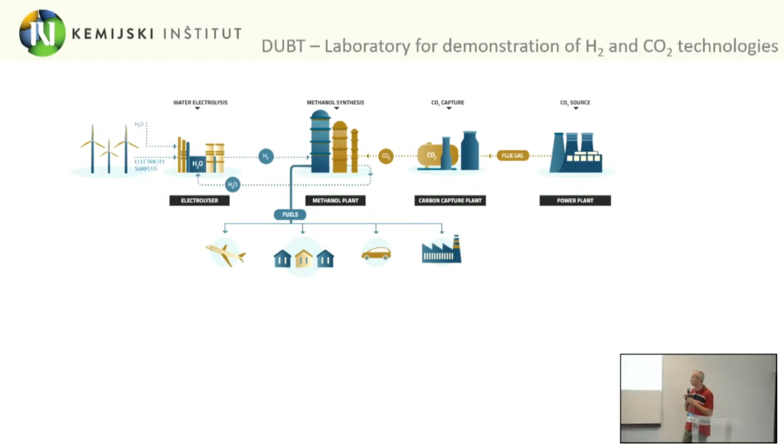So when you look at the dynamics, you have the oscillations of the grid, then you have the oscillations of an electrolyzer. You typically have a kind of hydrogen buffer tank in between. It's not shown here, but the bigger the buffer, the bigger the capex, but on the other hand, the bigger the buffer, the more storage you have, and the more you can dampen the oscillations of the electrolyzer. So this was the MEF CO2 story.

And nowadays, we're still heavily invested in e-fuels, but we've ventured much more boldly into ammonia. So Oracle is the first such project, where the idea of electrifying ammonia synthesis is by plasma, by induction, and having direct electrochemical synthesis.

Hydrogen Valleys is a concept I was just discussing yesterday about the Spanish case, where they have about 8. In Slovenia, we, for the time being, have 1. Its peculiarity is that it's transnational, in between the north of Italy, Croatia, and Slovenia.

Basically what Hydrogen Valley represents is a kind of new paradigm where you are also, in most cases, coupling together actors which previously would not be so intensively coupled—especially energy industry with other energy intensive industries like steel, cement, or in our case, particularly of interest, chemical.

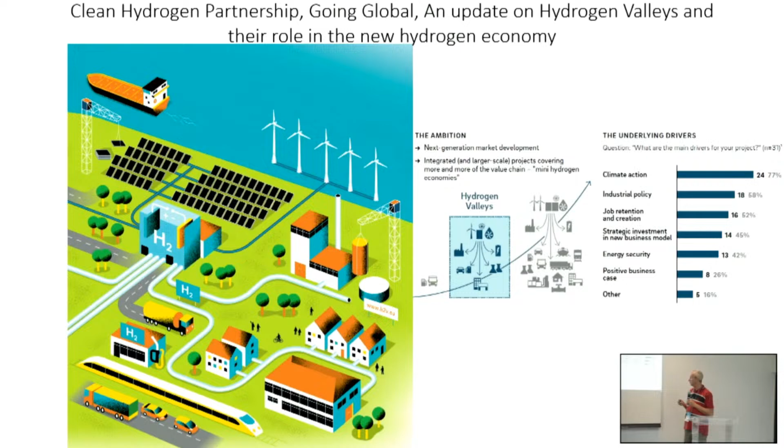Now, going more towards the use cases of hydrogen, where hydrogen makes sense at scale: the energy sector alone typically struggles quite substantially with hydrogen because of its offtake prices. Of course this will improve when the scale-up or ramp-up of production comes, and when the infrastructure is there. But before that, there are already island-type operations where there is a solid business case.

And I'm very happy that one of those, this interim project, is H2 Glass.

We have a container glass manufacturer in Slovenia that we started working with on hydrogen back when it wasn't trendy at all, maybe 2012, with electrolysis. They use the hydrogen and oxygen for oxy-fuel combustion, providing system services and creating about a 20% margin on the hydrogen, which they can't directly cover but offset through the premium on their products. They have high quality glass that sells for much more when it's decarbonized, defossilized, or even carbon negative. The beauty is the company is starting to use electrolysis and hydrogen commercially this year, as a continuous commercial process.

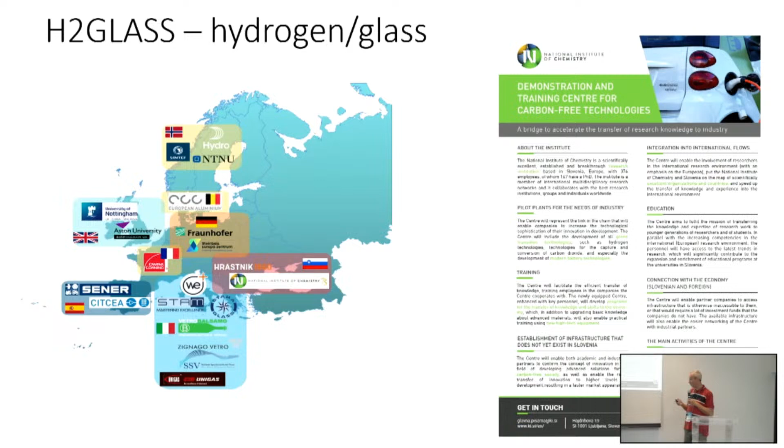Now going to sectors with less premium. I mentioned ammonia before as another opportunity that poses itself directly. Glass production, or any oxy-fuel furnace process, is a natural candidate because it also uses oxygen, as does gasification, which Paolo mentioned yesterday.

Hydrogen peroxide is also a prime example, because the two reactants you need are basically hydrogen and oxygen. Currently this is done by reforming natural gas to get hydrogen, and getting oxygen from somewhere else. With electrolysis, you produce both stoichiometrically, and can go toward the traditional anthraquinone process quite straightforwardly. Less mature approaches include electrochemical oxygen reduction to produce hydrogen peroxide.

This is one of the projects where we're actually moving toward the demo case, like H2 Glass, which is why I'm particularly happy to say so. The demonstration will be in Slovenia, and we are putting it together.

Ecoduct is also one such case where the premium is somewhere hidden in the production of chemicals. I think this was also briefly mentioned by Paolo yesterday, maybe not for the refinery case but for others. Within Ecoduct, the idea is to electrify the process and take care of the sulfur-containing compounds coming from a typical refining process, producing hydrogen and sulfur in between, and then going also toward e-fuels.

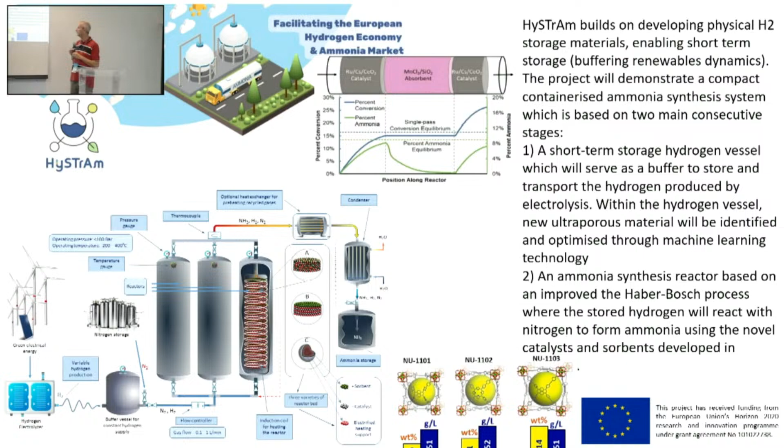I don't think I need to go again into the details of why ammonia is very interesting. It's carbon-free, at least directly carbon-free. It directly couples sectors of energy for hydrogen storage and fertilizer production. There's plenty of research to be done at higher TRLs, 5 to 8, but also at lower TRLs for plasma ammonia synthesis and electrochemical ammonia synthesis.

Dare2X is another example where the electrification is by means of plasma. The idea here is to have an electrified process to couple nitrogen and hydrogen to produce ammonia.

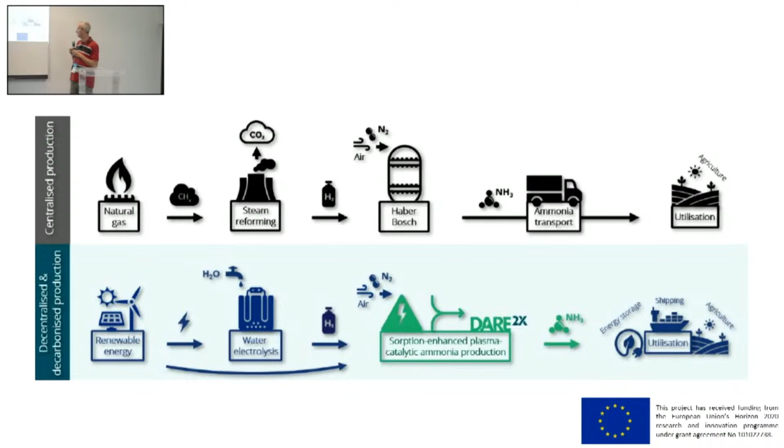This is how we are doing things ourselves, mostly investing in induction-based electrification of processes. Why? Because it's very fast responsive. It can deliver heat to the exact location, as opposed to joule heating or plasma, which is difficult to manage. With induction, if you have a structured material, you can heat up very selectively. And with the advent of renewables, you can do this in times of basically 10 seconds or so.

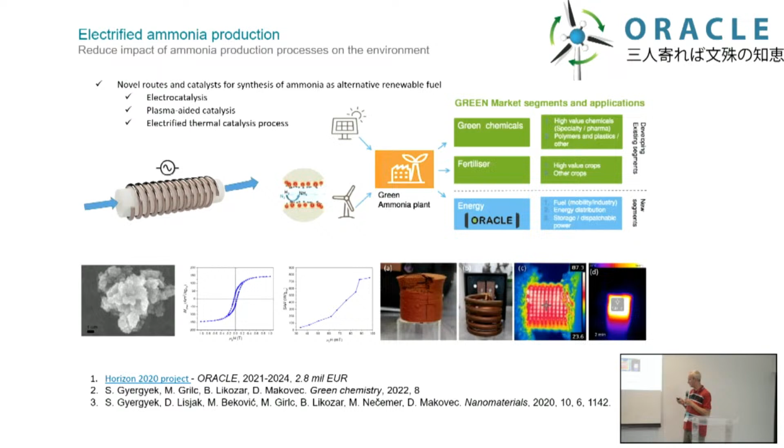There are also projects where hydrogen is going to very diverse sectors. Reveal is basically aluminum and aluminum oxide leveraging, a kind of aluminum cycle we're using for long-term seasonal energy storage, partially with and partially without hydrogen.

And as I've mentioned, various sectors — DINAMINE is a project looking at the use of hydrogen for defossilization of mining operations. There are a few pilot or demo mines all over Europe, graphite included, one even in Portugal, Felmica. The idea is to have defossilization of everything from mining equipment to mining transport.

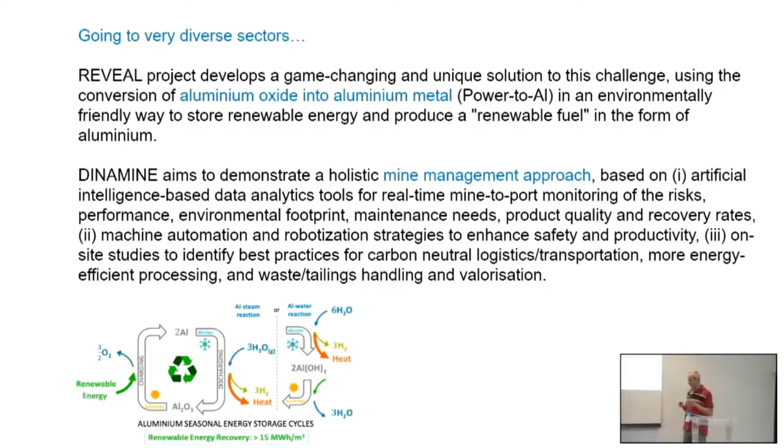We are also one of the coordinating regions in the Vanguard Initiative pilot, together with Malopolska and Lombardia. It's not a big financial thing, but it's a kind of liaising with other hydrogen initiatives like Hydrogen Europe and Clean Hydrogen Partnership that fits nicely with Vanguard.

The typical question of many people is always, do we always need hydrogen? Of course not. Hydrogen is typically the last one in line where we don't have any other options. Direct electrification is always the right way to go, and it's typically much more efficient.

I'm mentioning this because Slovenia is very small, so we don't have many Innovation Fund type of projects. We were very happy to find out that ours with the glass company was actually the first one, and it dwells on hybrid furnaces where you do as much electrification as possible with direct electricity instead of hydrogen, but of course you also have on-demand hydrogen.

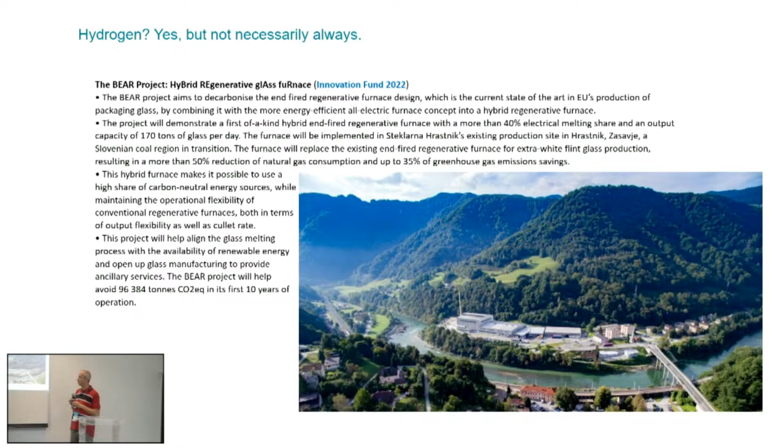So you can play around with various blocks and put together a business case depending on the availability of electricity, and this can also provide the buffer for your hydrogen. Solid or liquid hydrogen storage is always the best, especially if it's a nexus to some kind of production, in this case glass or iron manufacturing. You could just have a few silos and that's basically your energy storage.

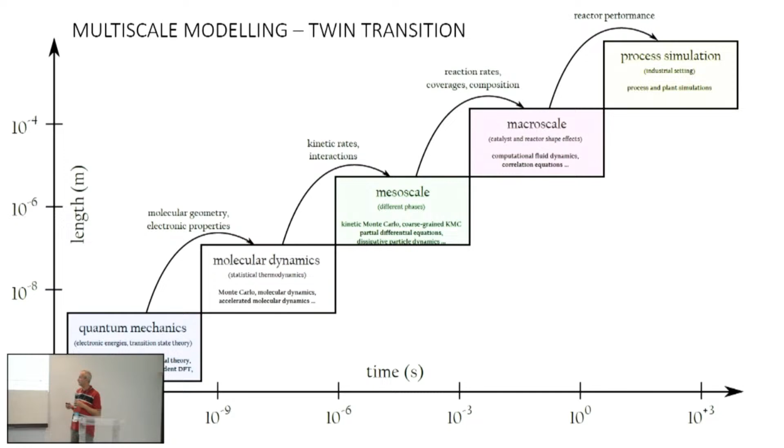Multi-scale modeling I've mentioned yesterday already, so I won't go too much into the details. It's inherently related to all of these processes if you want to know the dynamics at various scales. For this you need computational equipment, and one of the HPCs that was set up in Slovenia was, at the time of its build, basically 19th on the top 500 list. So this is something we definitely extensively leverage in our computations.

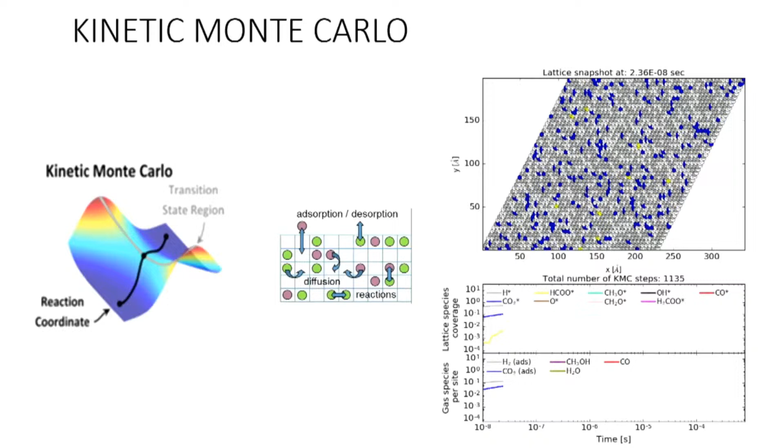Since I've talked about various scales of modeling yesterday, and there's just 2 minutes left, I will stop with this. We started off with, let's say, national TRL 3 to 6 projects, and it's very nice that we got our first broader hydrogen program that also invests heavily into research, which we are leading at the Institute. This will boost up the activities of the aforementioned center that is rising up and has so far gathered about 30 million euros in capital.

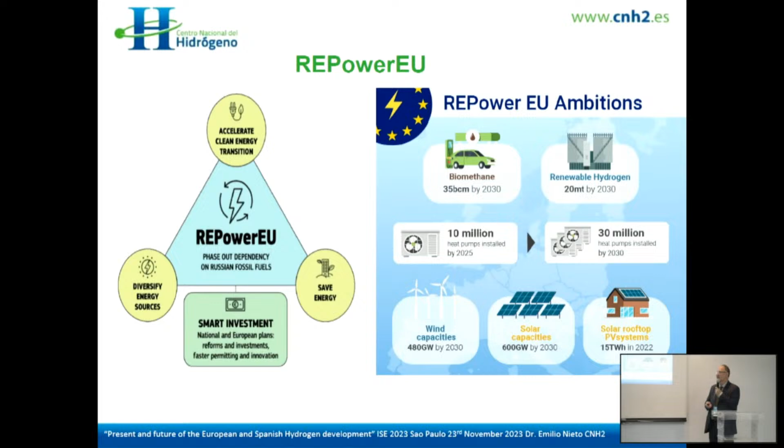So it's quite an important point, because now all of the countries need to rethink again and try to reinforce the messages and increase the main goals they have already set.

In the meantime, all the people are worried about the definition of renewable hydrogen and which are the clear rules for everyone to work together under the same conditions. It's not a finalized document, but what is clear is that there is a rule, a definition of how renewable hydrogen will be considered. Whatever you like it or not, what is clear is that there is a definition, and when you say you're using renewable hydrogen, you know which things you need to comply with to have that definition.

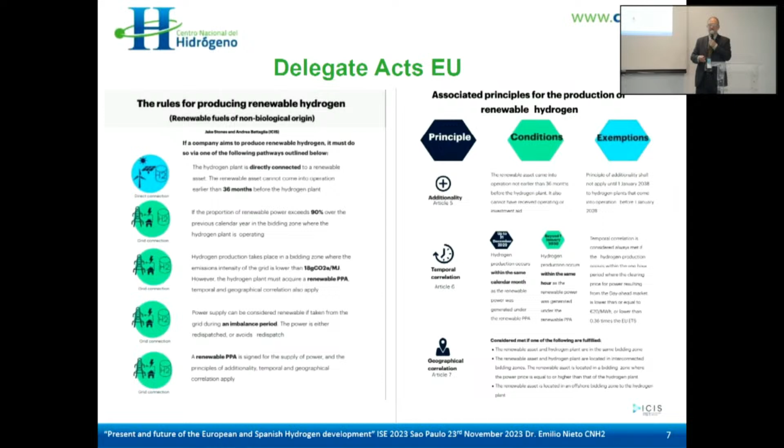There are some different principles and documents about the temporal rules, about new installations from renewables, in order to be able to continue working on that. So at least there is a common condition, a common ground for all the different countries in Europe, to work together and comply with these kinds of rules at the beginning.

As most of you know, on the 8th of November the Commission launched the first auction, 800 million euros, in order to continue pushing the movement of these projects put in place in the different member states. It has been announced that in spring of next year there should again be between 2 and 3,000 million euros in the second auction, to give the possibility for different projects that are on the borderline between green or red in the business model to go ahead or not. So it's important, it has been a success.

We don't have information yet about how many companies have applied, but what is clear is that among all the projects presented yesterday, and also presented by my two colleagues, some of them are costly projects, some don't have good advantages from the economical point of view. This is why these kinds of borderline projects can use this kind of money to be on the safe side from the investment. It's another kind of help to allow the different companies with different propositions to go ahead.

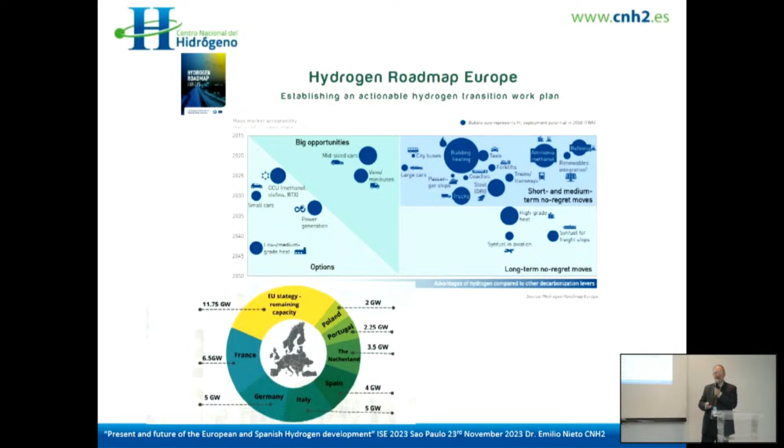If we want to talk about how Spain considers all this documentation, you know that the Spanish love to write papers. The problem is complying with the goals defined on the papers. But what is clear is that we have a lot of different documents, a lot of different roadmaps - not only for hydrogen, but also for renewables, for maritime applications, for wind, for auto consumption, and the last one is the guarantee of origin of the hydrogen. This is quite good in order to have the certainty that you are consuming renewable hydrogen, as all of us want, in order to move toward sustainability.

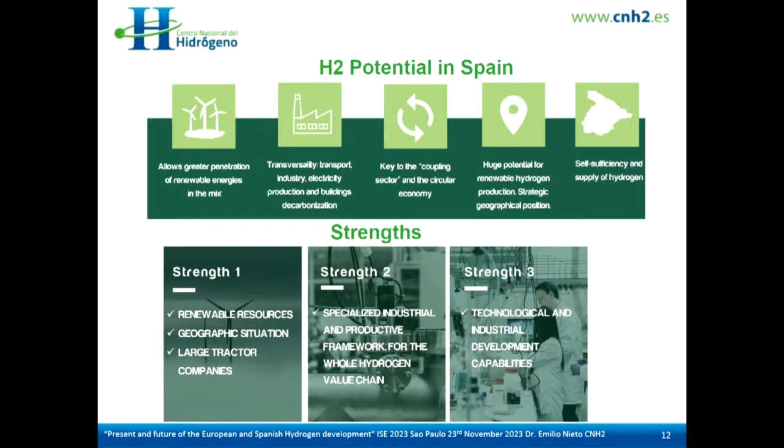Of course, you can imagine like Brazil - we have a lot of sun, we have a lot of wind, so we are in a privileged area from the geographical point of view. Spain is a country that can be seen as having high renewable potential and capability, also high capability from the different actors, the stakeholders along the value chain, in order to continue working together to be one of the top level countries producing renewable hydrogen.

We have reviewed our main goal, and you can see all of them are aligned with this REPowerEU. So we have to increase and rethink again, because the previous objectives that had been defined will not allow us to be in line with the different objectives that have been set. So you can see here we can multiply by 2 or 3 in some cases the amount of renewables, the amount of integration of renewables into the matrix, and the amount of gigawatts to be installed in 2030.

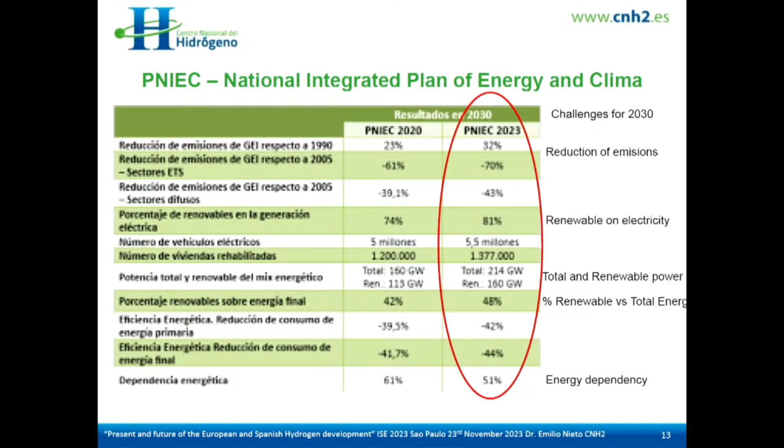As I told you before, from 4 to 11 gigawatts. And you can see here we have a commitment about the number of hydrogen refueling stations we need to have in 2030, the amount of the different lines of buses and trains, and the amount of vehicles, not only light but also heavy-duty vehicles in Spain.

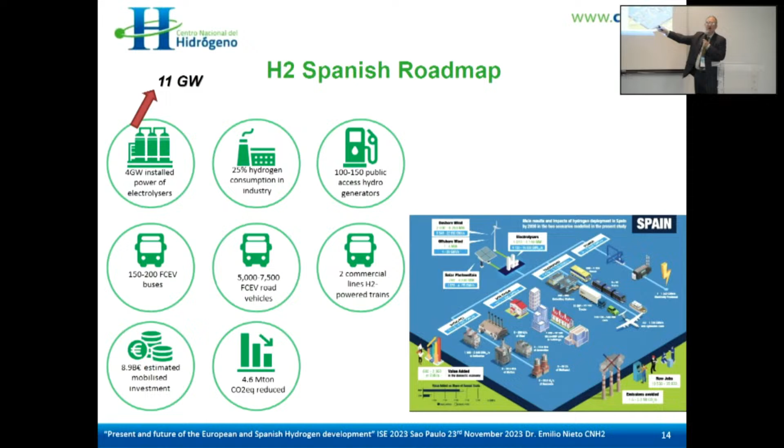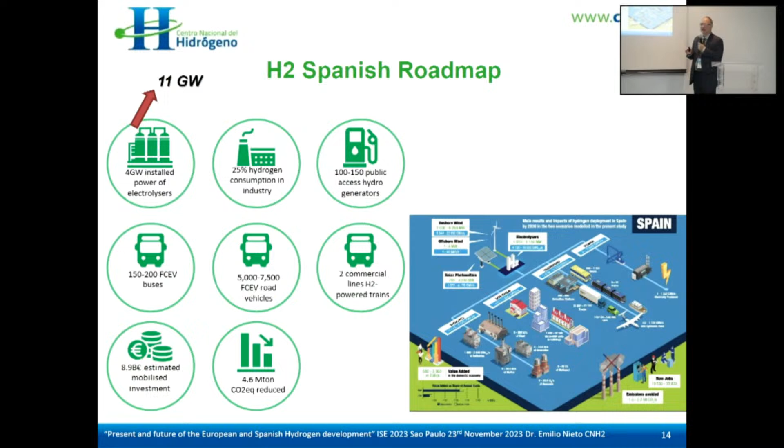So we have a lot of things to do, because - since I'm the only Spanish person here, no other Spanish hearing me - it's absolutely impossible to comply, at least with the number of hydrogen refueling stations. We have now, I think, 12 or 13, and we have to be at around 100 by 2030, so it's impossible. There are not enough equipment manufacturers to allow us to think again about having this equipment. You have to integrate it, install it, and pay for it. So it's very complicated. I would say that if we achieve 50 or 60, it would be a very high success.

This is the moment of the hydrogen, not only in Spain, but in all the countries. And we are receiving a lot of money from the Commission, around 70,000 million euros in order to make this transition feasible and possible.

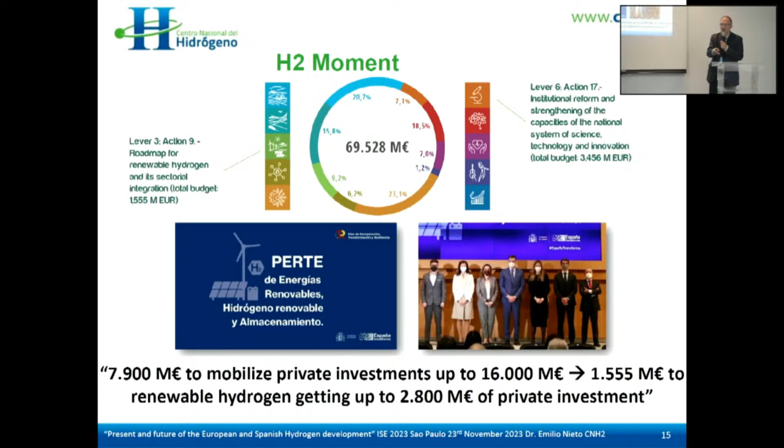This is not only for the administration, this is a public and private partnership. There isn't enough money for doing everything only from the administration, so we need to convince companies to invest, and the rule is more or less 2/3 from companies, 1/3 from administration. I'm giving you the warranty for this investment and how to work with safety and standards so your investment will be in a good position, and you as a company comply with this 2/3 in order to continue working and try to decarbonize the different industries.

If we look at the projects, yesterday I saw this picture, so I'll be quite fast. In Spain we have 123 projects running now, and most importantly they should be finished around 2026, so at the end of 2025 or beginning of 2026. We can say 1 year of delay, so 2027. In 2027 we will have 11 gigawatts and this amount of hydrogen to be produced in Spain.

What we have to work on is how the end use of this hydrogen will be. So the main goal is to convince companies to use this terrible amount of million tons instead of sending it to Central Europe, to be used first in Spain and later, with the excess of this hydrogen, to be transferred to the European Commission.

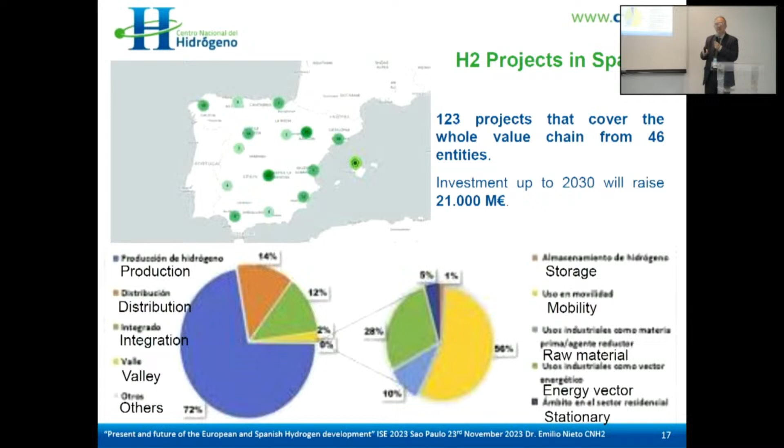But what's important for me, as I told you yesterday, is that we are covering the whole value chain. It's good news that we are focusing on production, but not only production. We are also taking into account the logistics and transport of this hydrogen, and we are working on the valley concept in order to continue working on a wide scope of different possibilities.

This is the map I showed you yesterday, so you can see some of these 123 projects, and later on I'll explain how different funds and proposals should be used to continue working with us. You also have innovation funds, large and small scale. These are some of the projects integrated in this 123. We need to use all the different tools you have in the Commission in order to save money and try to integrate all the different funds to be as effective as possible.

Also IPCEI - there are two, one for development of the technology and the other for developing the use. There are 4 projects and 7 projects coming from Spain in order to continue pushing forward, increasing the capabilities and trying to increase the integration and collaboration between the different stakeholders.

You have here a map. I told you 150 hydrogen refueling stations would be impossible to have by 2030, but there are organizations thinking about how the distribution of these hydrogen refueling stations should be in order to have very good coverage in all the different parts of Spain. It's easier because there has been many years working with natural gas, and the behavior is more or less the same for hydrogen.

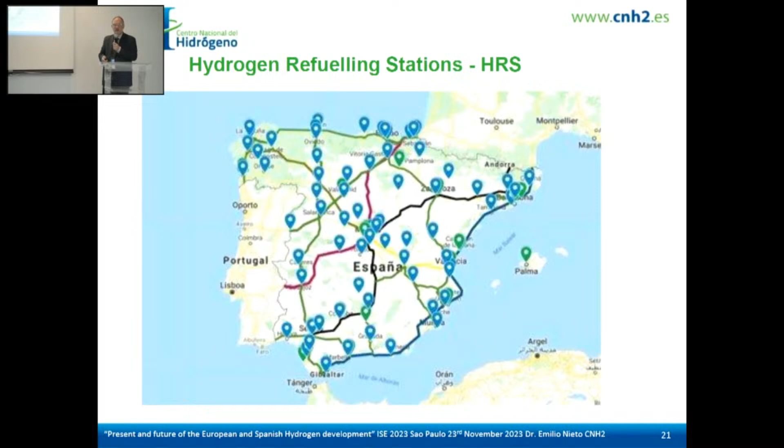There is a study showing that to have full coverage with natural gas in Spain, we would need 600 gas refueling stations. So for hydrogen, ideally we'd have these 600 for coverage, but this shows how the distribution of these 150 hydrogen refueling stations should be in Spain, so that if you have a light vehicle with hydrogen, you won't worry about having to stop or being in trouble if you continue driving.

H2Med - most of you know from the news, and of course the European colleagues know - it should be one new possibility to transfer at least 2 million tons to Central Europe through Spain by 2030.

We are not saying that this hydrogen needs to be produced in Spain. Mostly at the beginning, yes, in order to reduce the cost, but in the future it could be that African countries send this hydrogen and pass through Spain in order to arrive to Germany, to the Netherlands, or to Central Europe. This is the possibility being offered to the Commission, and the project is working with all the TSOs in some of the countries - Portugal, Spain, France, and now Germany - are the 4 countries working in order to build that.

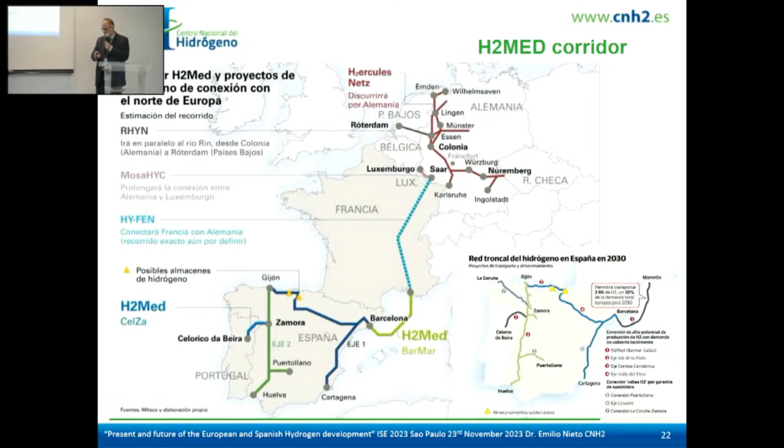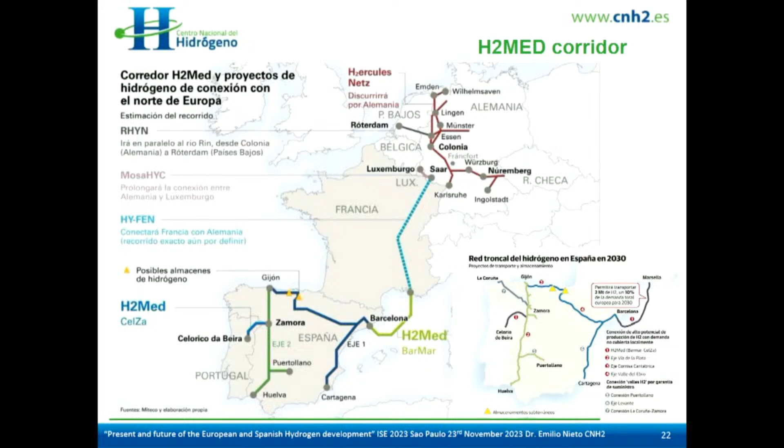So it's a very huge investment of money, and the good possibility in order to continue and build a hydrogen transportation, 100% of the hydrogen to be safe and to be able to have this kind of renewable sources in all the different countries for us to continue moving together.

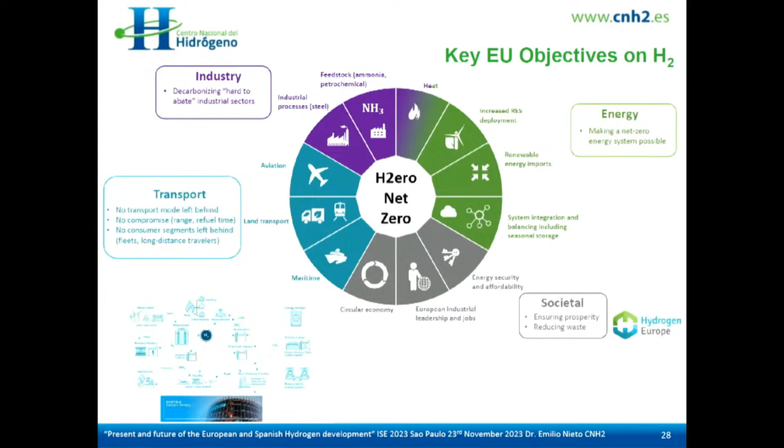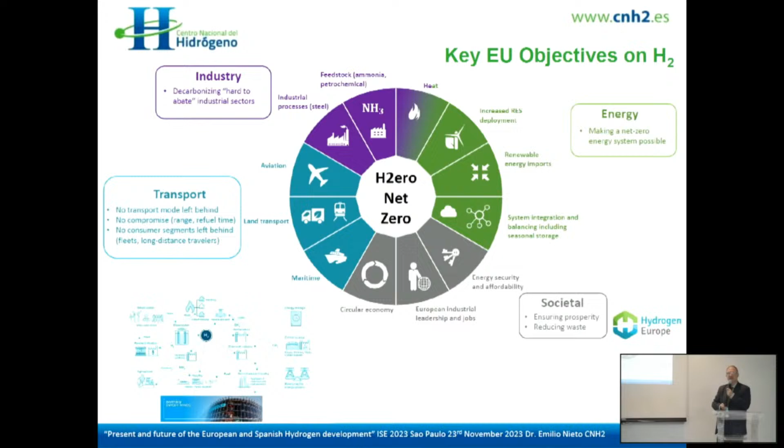To finalize, this is a diagram showing the challenge ahead of us in order to continue working on all the different paths. What is most important for me is the societal aspect. We need to have this kind of process here in order to convince people, to explain what hydrogen is, to explain the added value of using hydrogen, and how this hydrogen or renewable and sustainable development could help society comply with the different tasks.

Hydrogen is not good for all applications and for everything. This should be one part of the value chain. Another part should be batteries. Another part should be other alternatives. We need to know, understand, and develop everything, and use the best in the different parts of the solution. So the idea is batteries should be for light vehicles at this stage, and hydrogen for heavy duty.

In the future we will see, because there are a lot of people working on improving batteries, and also a lot of people improving hydrogen, and we need to work all together and try to have, like, a panel of all the different solutions available in the market in order to comply with the different tasks.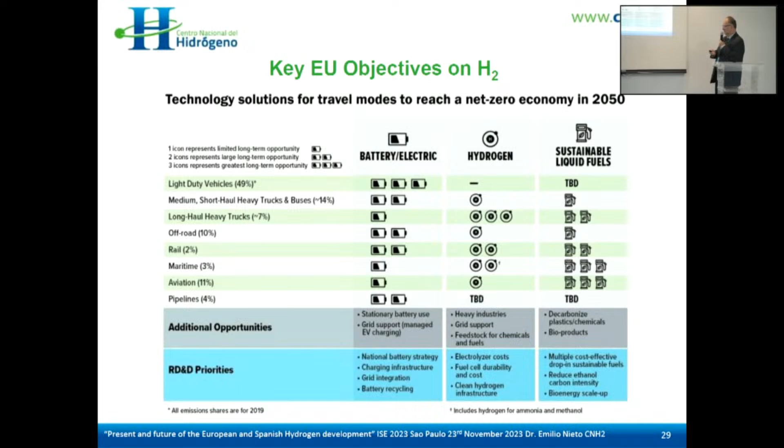And I think the cost should be an issue. We need to work with economy of scale in order to reduce the cost and try to convince more companies to be able and ready to continue working. Now it's an expensive technology, like always - when you are starting with this technology, you need time in order to integrate and try to optimize all parts of the process. This means in the future we'll have the possibility to reduce the cost.

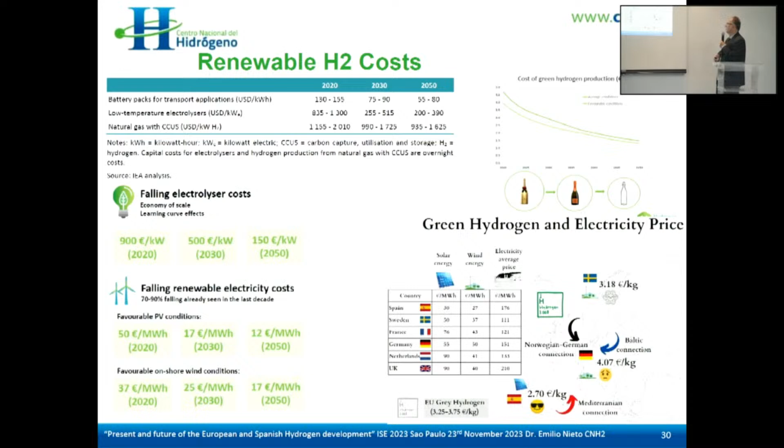And the final slide, it should be the myths. There is a lot of information that people don't know, and this is an obligation for all of us. We need to explain this is not costly, this is not new, this is a renewable source, this is a gas, and the gas allows you to do that and that.

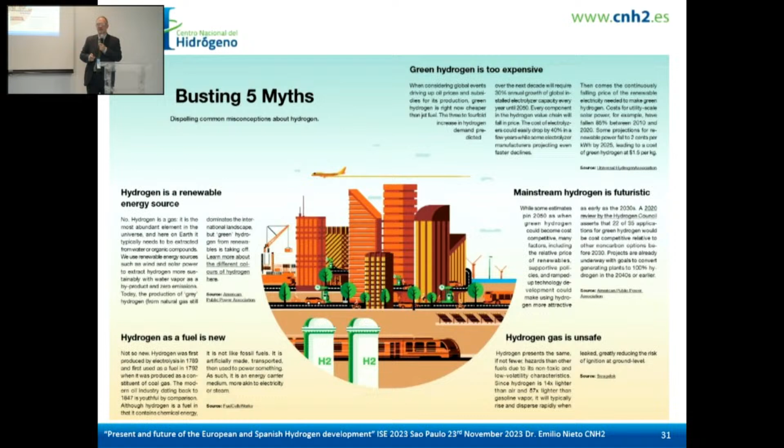So we have a lot of things to do. This is good because we have a lot of work ahead of us. At least, I don't know about my kids, but for me, I will not see the finalization of this kind of transition in the future, but it should be something that all of us need to embrace in order to be part of these historical movements, in order to have the possibility to be more green in the future. And that's it. So thank you for your attention, and sorry I'm late.

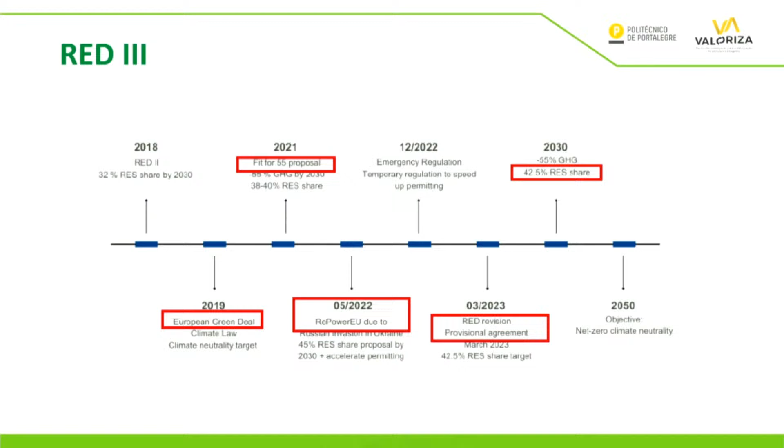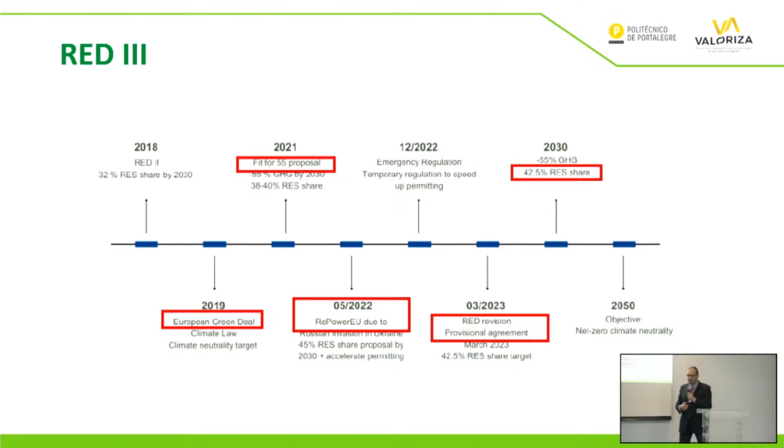I will not talk about this very much because Emilio gave an excellent presentation about the European strategy related to renewable energies, and also the guidelines that we have recently, the third guideline. This is related to renewable energy, and we have to put together this necessity of increasing ten-fold. There's a big challenge, and there's a big opportunity here.

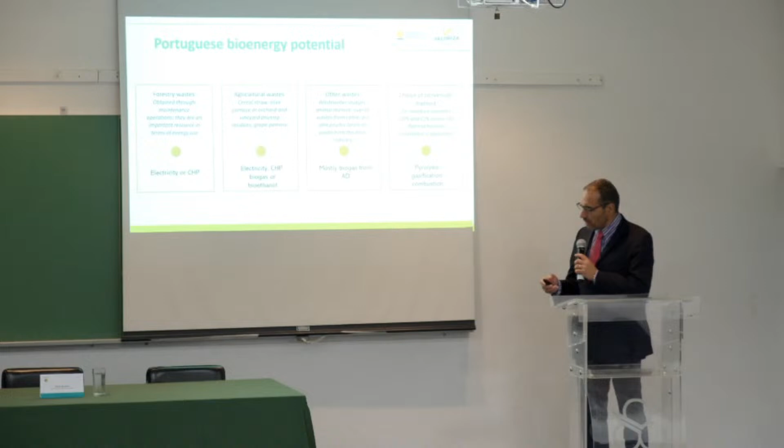I already talked about this, I'm not going to talk again. Let's talk about the potential of bioenergy in Portugal. We have great potential in terms of raw material for the production of biogas, both in terms of waste and cogeneration, and also agriculture collaborating with biogas.

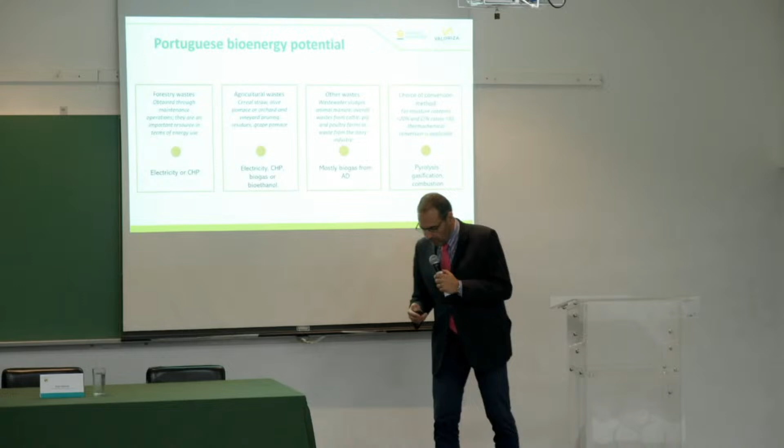There are some effluents and waste for the production of biogas, and also anaerobic digestion. And also we have a set of technologies like pyrolysis, gasification, in terms of lower humidity, more solid waste that can be used.

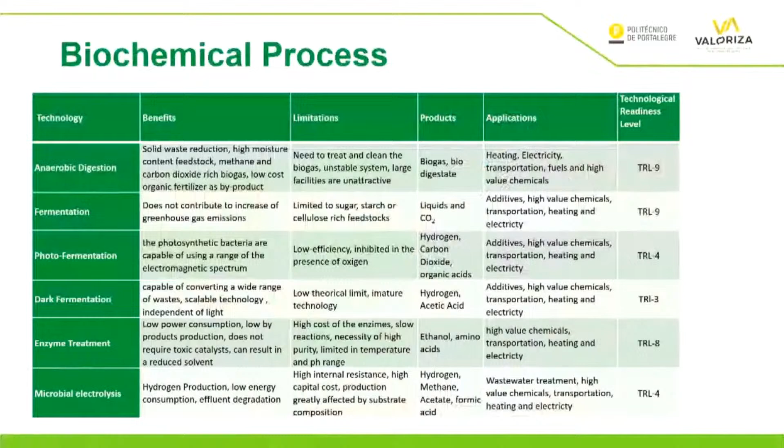We have a set of technologies with different levels of maturity, and we have been working with some of them at different levels. This is a summary of the main biochemical technologies that allow us to produce renewable gases. The first ones are more developed, the process of anaerobic digestion and fermentation that allow us to produce biogas and biomethane, which will be purified later on.

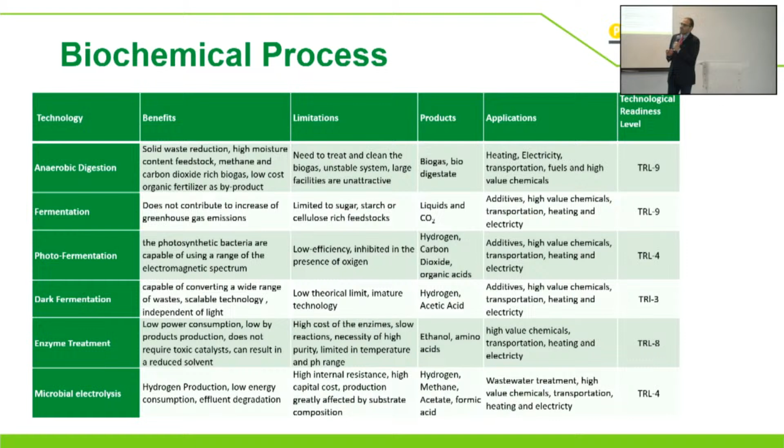We'll talk about this later. We have other technologies here that we've been working with, and we think in the near future we will have a contribution for the production of gas. And then we have the thermochemical processes, which have different levels of maturity.

At the top we have combustion processes, incineration. These are processes that allow us this valorization process, simply talking about energy, so we're producing thermal energy in this case. These processes already have a high maturity level, but they present sometimes a difficulty in terms of environmental aspect or the sensibility of society itself. So we have to be careful.

In the Portuguese case, our big difficulty is the incineration of urban waste. There are some units that process this incineration of garbage from the cities, but this is not exactly the path that we should be taking in terms of environmental consciousness.

So we have to analyze this gasification, pyrolysis. Gasification, as we mentioned yesterday, has a maturity level that is a little bit higher, and this allows us to use this waste. We can make this screening of this waste, but there's a good potential here.

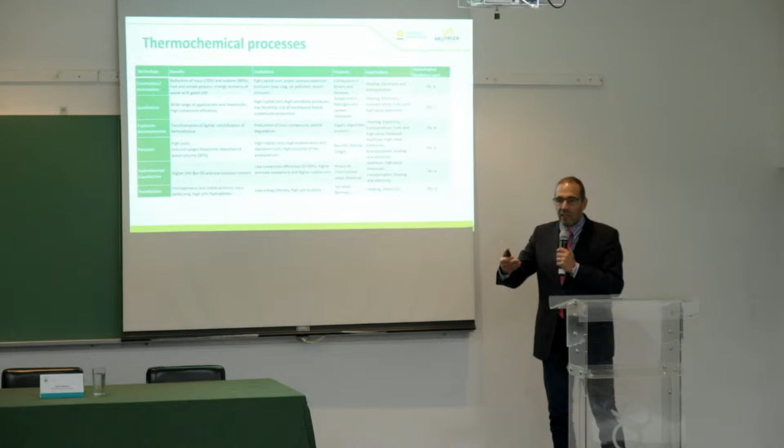Pyrolysis allows us to produce not only a gas, but essentially biochar, a biocoal with different applications. For example, in the treatment of effluents with activated coal, and also in soils and oils. There are bio oils also that involve a chemical process, having this refinery for different fuels to be produced. We have different other projects in pyrolysis, and there's a reference here of another processing.

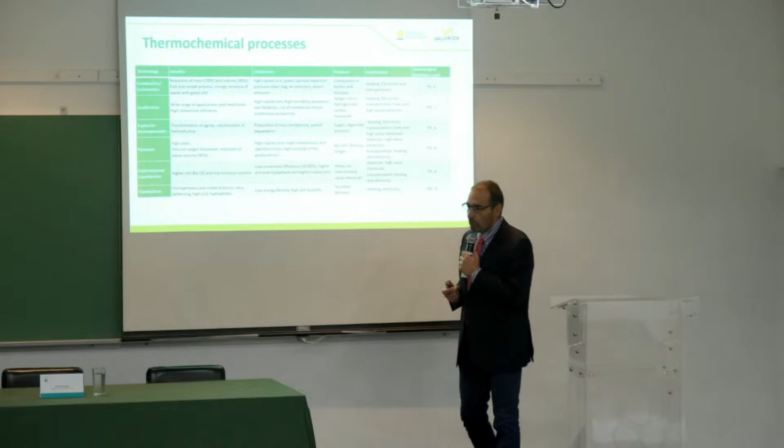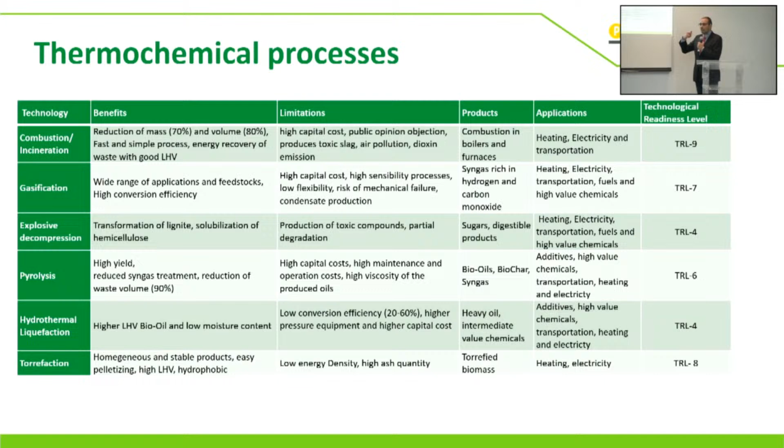This is a process of producing coal, and we can think about this as a pre-treatment. Many of the waste have this degradability that doesn't permit transportation. We have this thermal treatment for the coal, and then we can process lots of these materials, and produce a product that has a higher calorie level. This we can understand as a pre-treatment for solid fuels. Also, we can use it in terms of heat, gasification, and other uses.

Let's talk about 3 or 4 projects that we have been developing. This is in line with the projects that I mentioned yesterday. I've been talking about these demonstration projects, the scales, with already some dimension in terms of the production of gas. And I would say there are projects that are more centralized.

I think it's important to say that when we work with this raw material, the waste, for example, a very important factor is the transportation of these materials. To transport waste is not a good solution, we don't want to transport them. So our focus is to work in units that are not on a big scale, but having this smaller characteristic that allows us to have decentralization of production.

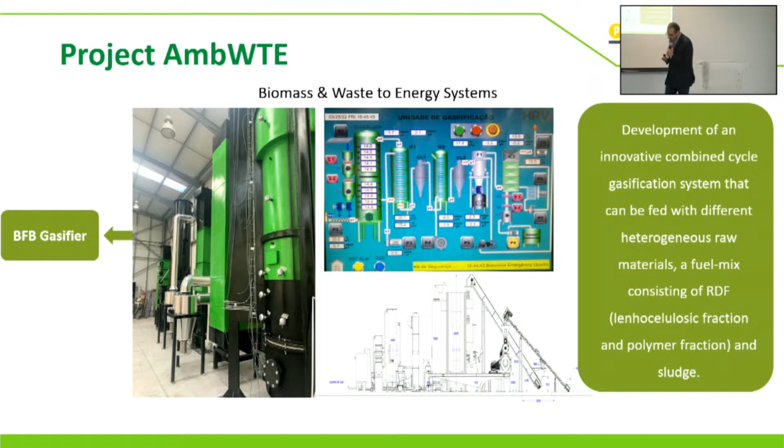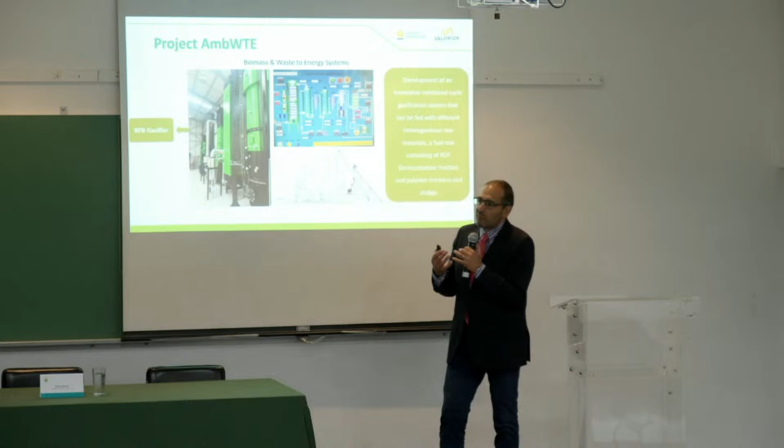We have a project here that is applied. They received the national fund, and they have these small units of gasification. This company already works with thermal production of energy, and there is an evolution here of the market, and the systems of this dimension, because they are relatively small, can be installed in small or medium companies, with the perspective of valuing, because part of this waste cannot be burnt or incinerated, so it goes for biogas. This allows us to produce or treat 10 or 20 tons a day of waste for many companies, that's interesting for many companies. So this demonstration unit is completely installed, completely set up.

This concrete case here, we're talking about the processing of this kind of materials. We're talking about solid urban waste, and plastic of different natures. We're talking about residues in these landfills. These fractions are very difficult to process, and this unit that we have developed allows us to get this material through a pre-treatment process.

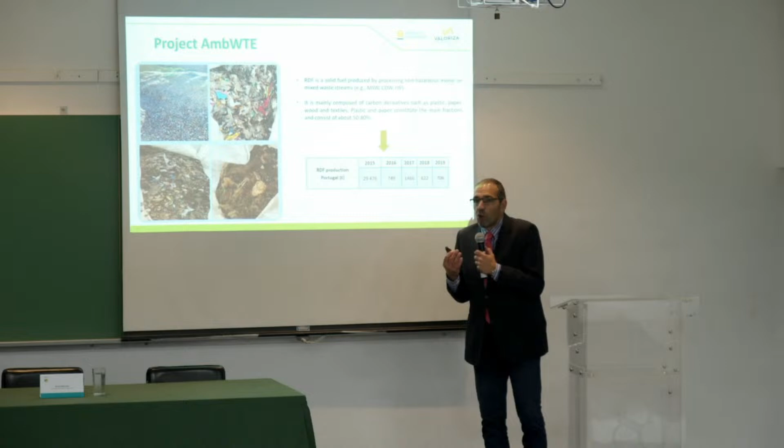With this heating process, we remove part of the chloride that is in the material. And chloride in this thermal process is a very negative element in terms of corrosion and degradation. So what we do here is a pre-treatment in the unit I have mentioned, this heating process with the washing of the material to remove the chloride, and then later on it is processed for the production of gas.

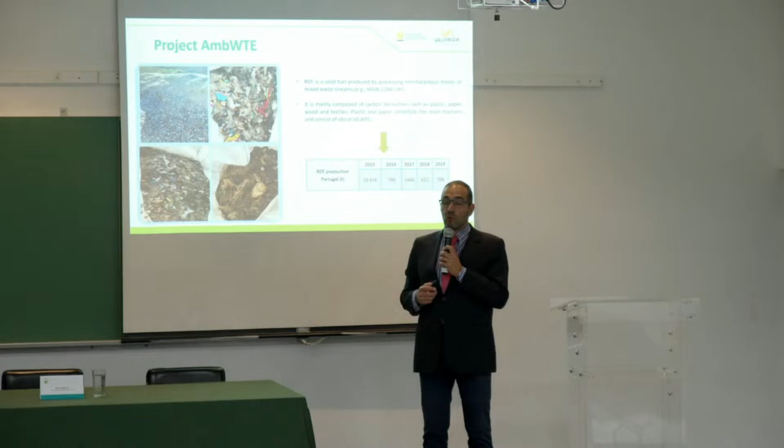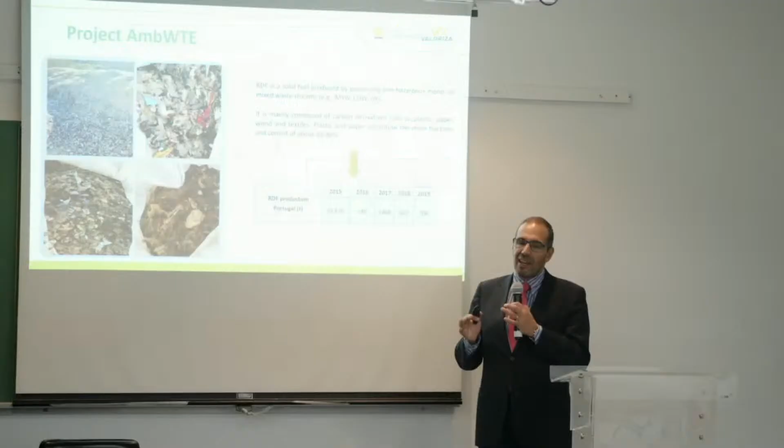In Portugal, we had a cement kiln using this waste, basically these materials I have mentioned, used in the cement industry. But cement production in Portugal has dropped, especially related to the crisis we had in 2011, and we then stopped using these materials. But this is a big problem in Portugal because there isn't a demand or a way of processing these materials. So this concrete project is only a small project that will be using these materials.

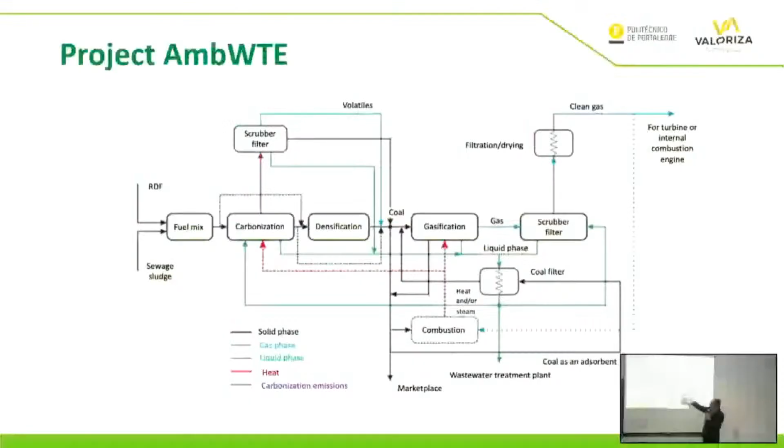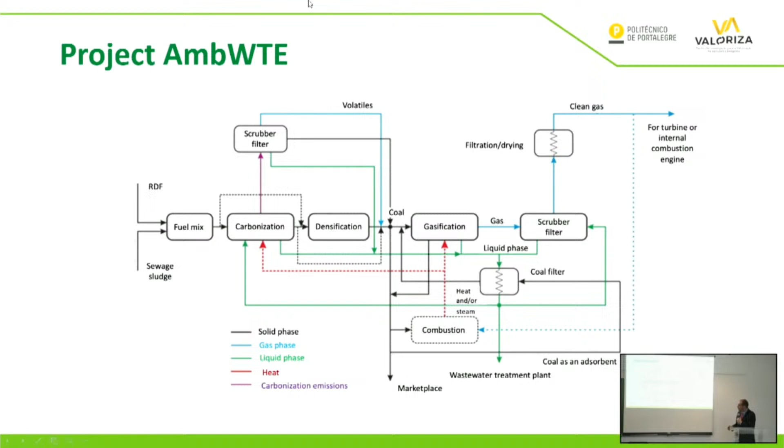And you have this process: we have the carbonization, the heating process that I mentioned before, and we can remove a significant part of the chloride materials. And there's gasification, and the gas can be used in many ways, especially for combustion or the production of energy, electrical energy, or other fuels.

This allows a more direct application of the gas. The logic of this process: I have a gas that's rich in hydrogen, but I don't want to go 100% to hydrogen, I don't want to upgrade until I can get pure hydrogen. So we need a simple application for this gas that gives economic feasibility, so that it's easy to apply the resources, and also very quick without many conversion processes involved.

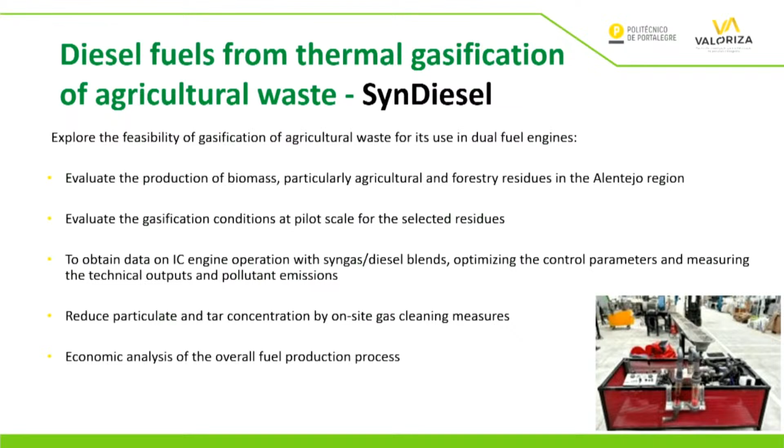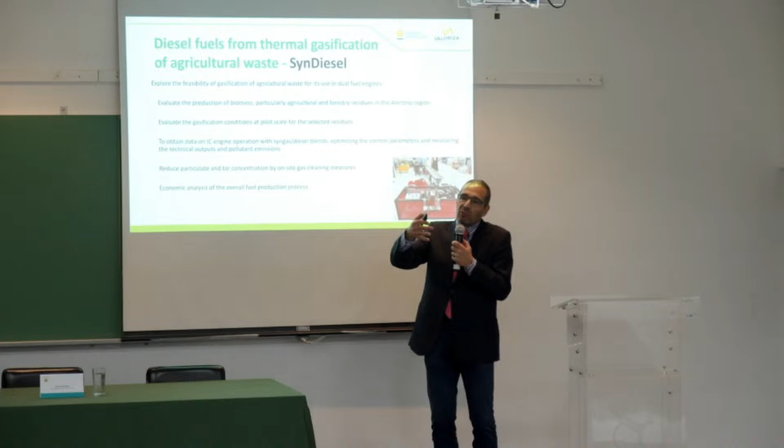So the idea is to work with normal engines, gasoline or diesel engines, and convert this engine to a gas engine. This is what we want to do: dual fuel mode. This dual fuel mode allows me to use the engine with diesel, but substitute part of the diesel, or gasoline if it's a gasoline engine, with gas.

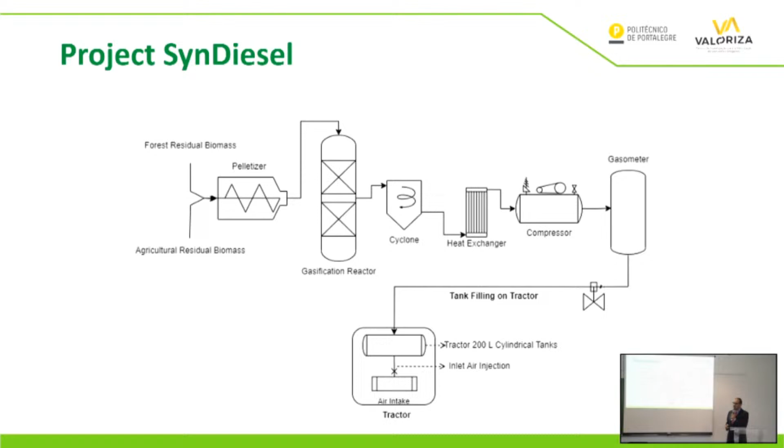So we have a lot of units that we have set up, associated with a conversion process. This is a unit where we get the waste, convert it into gas, store it, and then this gas is used directly in the engine. I'll show the engine again.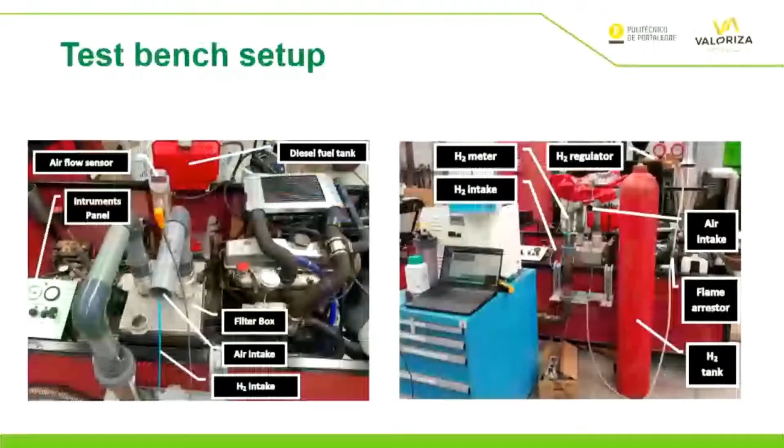It's a simple engine here. We have to install just two pieces of equipment. One is to store the gas — we need a new tank to store the hydrogen — and we also need this mixing system. The gas that is produced is mixed with the air and goes into the engine. So this makes the application very simple.

We have been working with these tests in agriculture, using tractors and diesel equipment like tractors and other equipment.

And we have been working with the stone mining industry, the marble industries. These are very fuel-intensive industries — all the equipment to extract this material uses diesel. So this industry has to decarbonize. They use heavy equipment, and it's very difficult to electrify all this equipment, these tractors. It's not easy, and it's not practical for an industry to use, for example, electric engine motors.

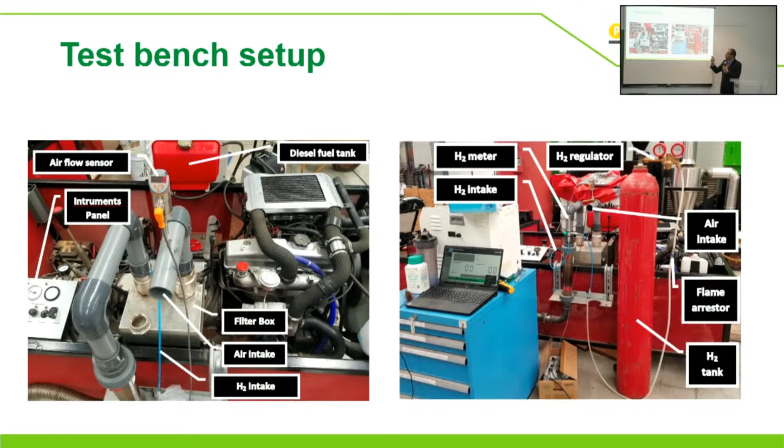There is a very simple alternative for these companies. For example, agriculture companies that have biomass resources, companies that have natural materials like these natural stones, together with these agriculture zones having biomass in abundance, can convert this biomass into gas. The gas doesn't need very complex treatment in terms of upgrading, and can be used directly in the engine.

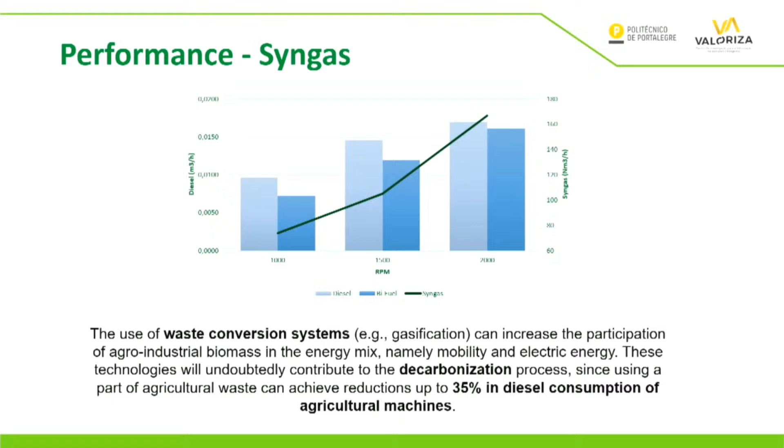And we have some results. This is the performance of an engine with gas. We decrease the necessity of diesel, and we also increase the power of the motor. We were able to get up to 50%, with results around 35% in terms of substituting diesel with this gas, and we were able to increase the performance of the motor by 50%.

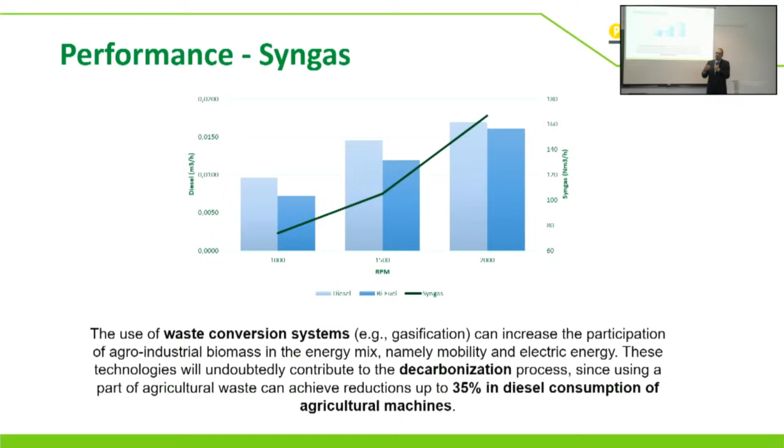We have been installing the systems in tractors, real equipment, and they have been used at demonstration scale with this kind of technology.

And when we talk about hydrogen, if we have the availability of hydrogen, we thought about working directly with hydrogen using this strategy. There are dual motors, as I mentioned, using a gas rich in hydrogen but not pure hydrogen — though it could also be used with pure hydrogen.

What is the advantage we see here? In the future, this internal combustion engine can work with hydrogen — yes, that's possible, because we know there are already works being done showing this. So what we thought, in terms of a transition, especially in countries like Portugal that have difficulty in terms of investment — we have a lot of small and medium industries that have difficulties gathering investment — is that these companies could be able to use these engines with internal combustion.

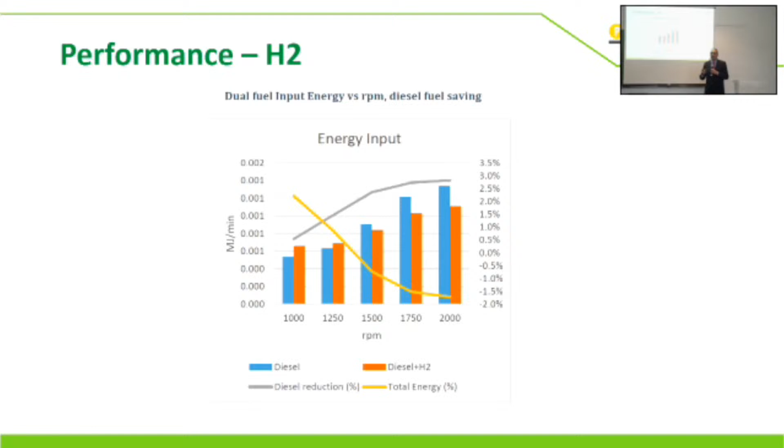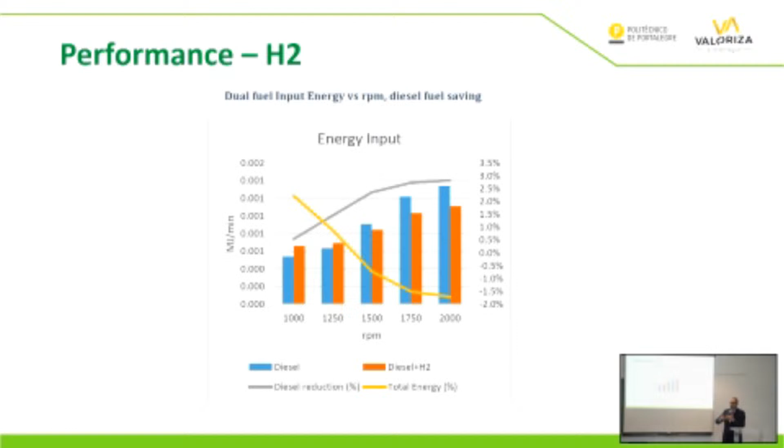With just small conversions, they can start using these mixes with hydrogen. This is, in reality, a decarbonization factor that is very efficient and can be quickly implemented with very low investment. This is what we have been working on, with engines using pure hydrogen — they work in dual mode with syngas, but also with hydrogen.

To end now — nobody told me that time is over yet, so I will continue. To end, yesterday, before the coffee break, we have some other applications.

This process is not very efficient, and there are difficulties involved. We need to have this treated effluent with conditions that can be reused later on. We know exactly that this is a difficulty, so what we decided to do is to have this different treatment.

We have this electrical oxidation process that allows us to have this tertiary treatment alongside the biological processes. We use electrolysis for this, and we have been developing electrolyzers specific to treat these effluents, and we in fact have patents on these electrolyzers already. It's not a traditional electrolyzer, and this allows us to use effluents that are not so clean.

This electrolyzer is a technology to produce a final oxidation of the effluent, but we are also having hydrogen generated in the process, as part of this tertiary process. So this hydrogen is collected, the gas is also captured and collected, and all the mud is dried into solid mud.

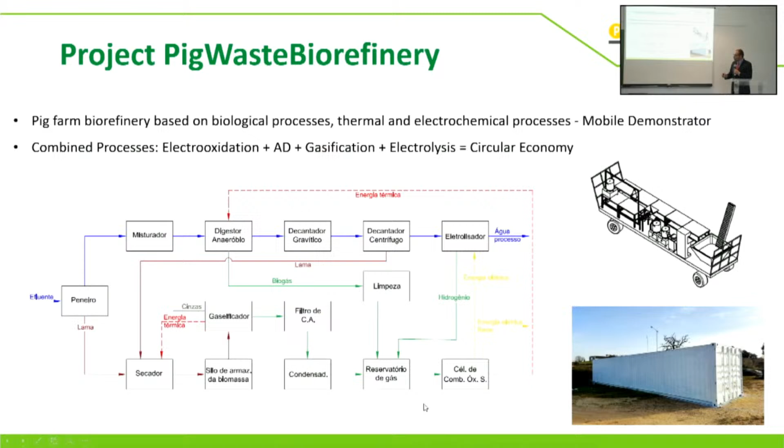This is the process of energy. I'm going to just go forward. And now, really, to end my presentation, this is a project, a challenge.

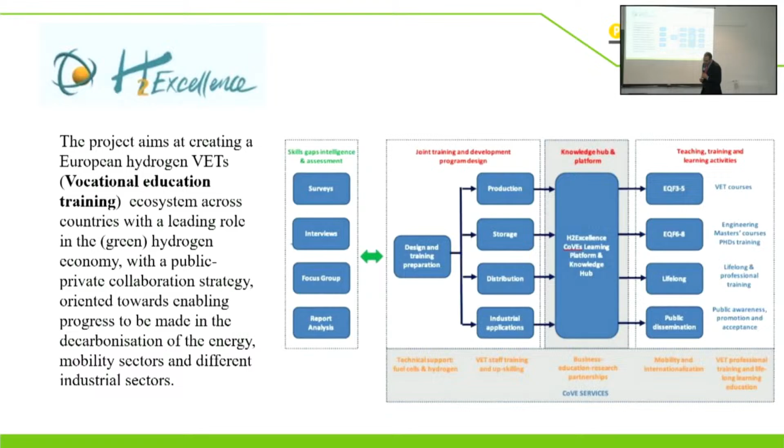Yesterday I talked a little bit about this. We have some concerns in Portugal in terms of academic formation. This is a European project that we are really interested in, with more international partners involved. This is a vocational training course, formation courses that are highly applicable, at another level for hydrogen.

We are absolutely convinced that it's vital, the academic possibility for these people. Of course, we don't have anybody coming out of college with complete know-how about hydrogen, but there is this necessity, technically, we have to form technical staff in Portugal, not only in Portugal but in many other countries in Europe and around the world.

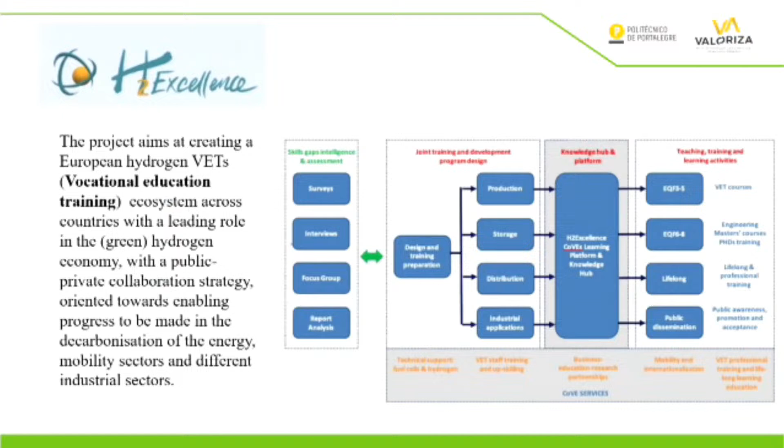We are focused on this academic formation, and this is a project that will allow us to have very big consistency for this, right? I mentioned this. Thank you very much, and I'm available for questions in case you have any.

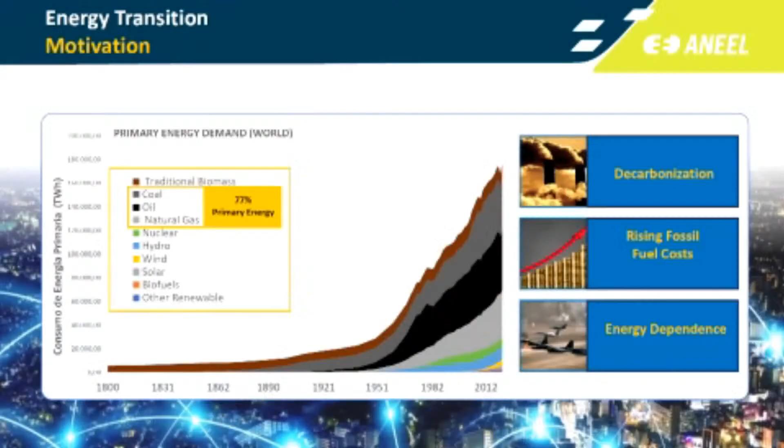After this, we had the exponential growth of population and the necessity of foods and services. For the good or for the bad, this growth has been supported by fossil fuels, and almost three-quarters of this primary energy in the world now has been fulfilled with coal, oil, and natural gas and derivatives.

In Brazil, it's a little bit different in terms of energy. There's 45% from fossil sources in our energy matrix, and the rest of the energy is basically renewable. But still, Brazil has a big role in this.

What is this dependence that we have on these fossil fuels? We have this climate change, the global warming, the oceans - we need urgent actions as a civilization, it's a problem, right? These fossil fuels are buried, they're finite, and with exploitation they are reducing, and geopolitically speaking they become more isolated with higher cost.

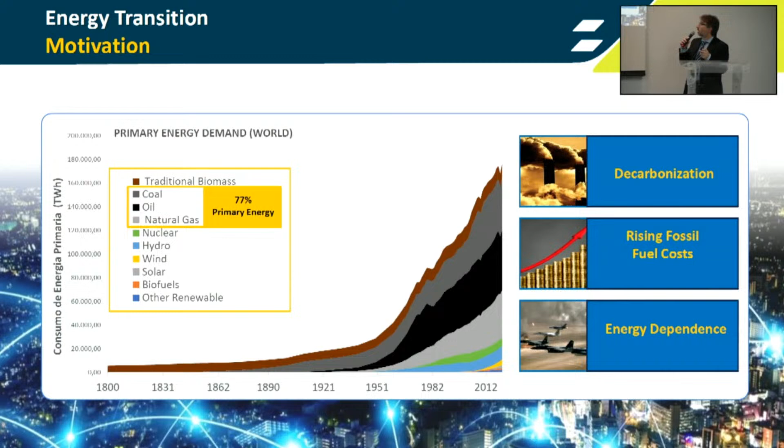So this transition, we mentioned that it has to work on a tripod. It has to be environmentally sustainable. It has to generate the use of energy in a standard that doesn't damage the environment. But also, we need this energy security, right?

Safety, and you don't have this certainty of being able to offer it otherwise. So you have to be careful, and equity is very important because some people in society cannot feel themselves impacted with some kind of negative impact while others are not having this negative impact. So we have to find a balance in terms of what's going to happen, and this tripod in terms of equity, security, and this environmental problem, right?

And we have to see if this transition is feasible, right? To assure this efficiency, it has to be feasible, and we have to work hard in terms of financing, and the division of costs will be shared between the consumers that will have to pay for this, right? And also the taxpayers that will have to take hold of the costs in order to mitigate the impacts of this transition, right?